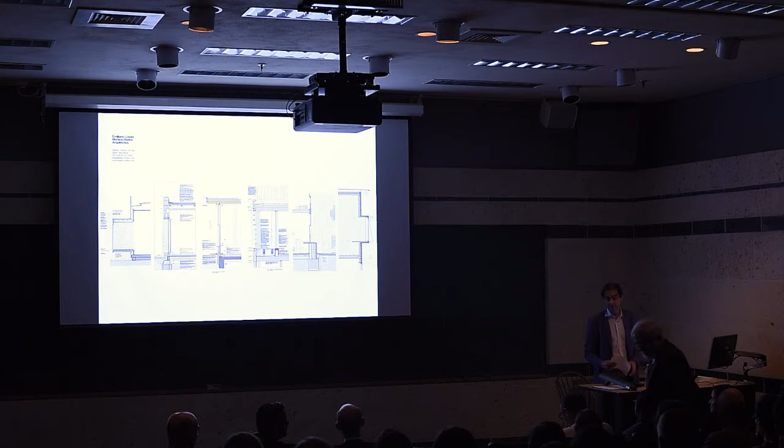Architecture awards, including some very prestigious ones. I'm going to go over some of them. The Young Architecture Award of the 10th Spanish Biennial of Architecture and Urbanism. The first place also in the 7th Ibero-American Biennial of Architecture and Urbanism. The first prize, the Architectural Review Emerging Architecture Award from London, a very prestigious international award, and the design distinction from the ID Magazine Annual Design Review. Also Spanish awards from the FAD Architecture Award and a nomination, a very important European award, for the 2009 Mies van der Rohe European Award.

The projects have been published in national and international publications such as Croquis, Domus, ID, Interior Design, and the Architectural Review in London. The work also has been exhibited in many different venues, including in Paris and in the Venice Biennale. All the work has been recently published in a monograph. That is a fantastic book. I really recommend looking at it. I have it in my office. Have access to your office? Yes, my office is always open and it's on the table, so you can go there and look at it.

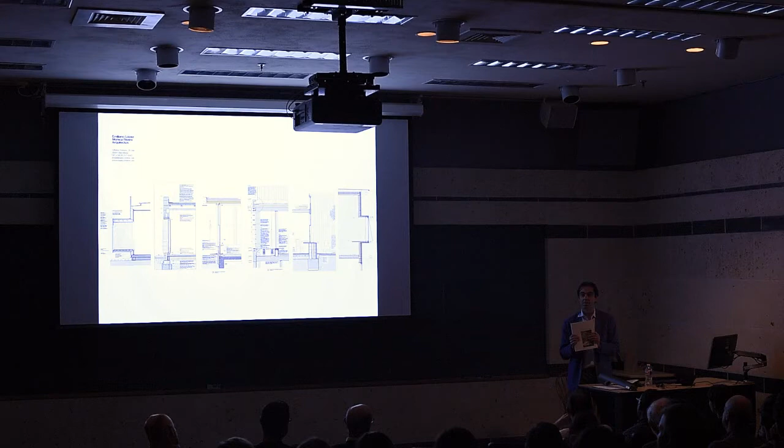What I like about the book, and I discussed it with Monica, producing a book like this really feels like another building, another project. You can see almost the exact same sensibility of the work in the book itself, in terms of the care, the attention, the detail, and the design sensibility, and it's a huge effort to put these books together. I think it's a fantastic representation of the work that we're going to see today in the lecture. So please join me in welcoming Mónica Rivera today to the school.

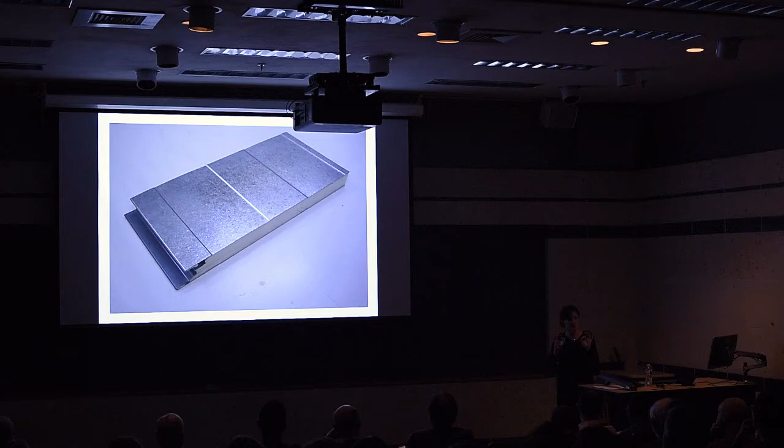So, well, we said we'll think about it, and he also asked for certain trades that he had very good ones. He said if we could use those trades, that'd be great. So finally, we had to build here in this hostile place a 4-star hotel with a contractor with no experience, and the clients didn't have any hospitality experience either. We didn't either. So it was really a challenge, and we decided that what we had to design was not so much a building, but a strategy to make this happen.

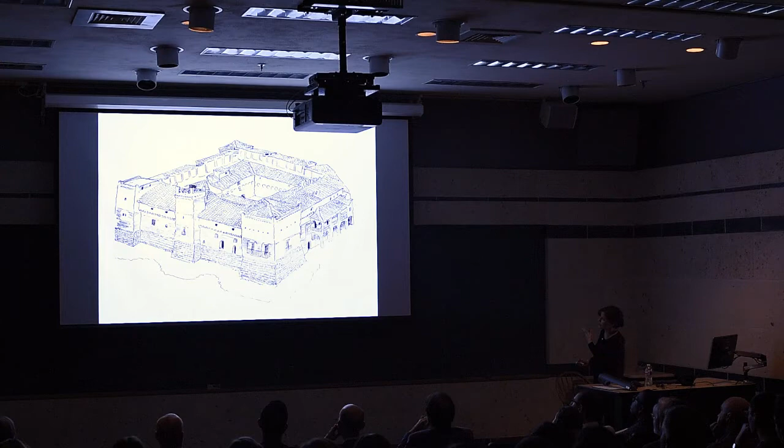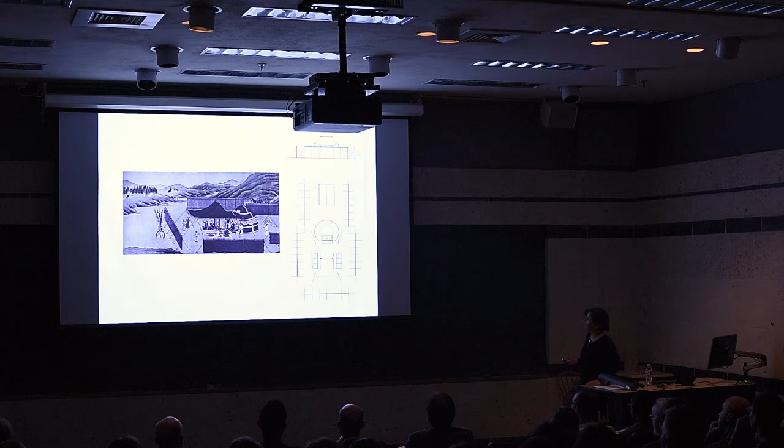So thinking of this extreme weather, we looked at buildings in the surrounding area, constructions protecting from the elements. In this place you want to be protected and feel protected and look out to the landscape, but heavy construction did not seem appropriate for such an open land. So we were also interested in the opposite, which is a very light construction, almost slightly touching the ground, for these sporadic, how do you say, stayovers in this place.

So we began to think about how the windows and all the openings could protrude out to create a false perception of depth. We began thinking of that sandwich panel as a real possibility of making a very thin enclosure, as if the facade is almost the lining of the construction, as if the masonry might be missing from the sides. So we began studying different ways that could be done, but finally we settled for the simple, very economical solution of the square projecting window, sometimes with a bench, sometimes with a bed. And we established this relationship very early on between the bed, the window, and the tree or the landscape.

This was an early image of the project. We kept it all in one story to make it simpler to construct. And for the massing, a reference was Donald Judd's concrete boxes in Marfa, as a way of working with a very orthogonal and simple structure by turning it, creating a play of light and shadow, and minimizing the massiveness of the building. Early models of the place, essentially with a series of patios in the center protected from the wind, other patios protected with some other light element that we didn't know then, and some of the rooms with outdoor access.

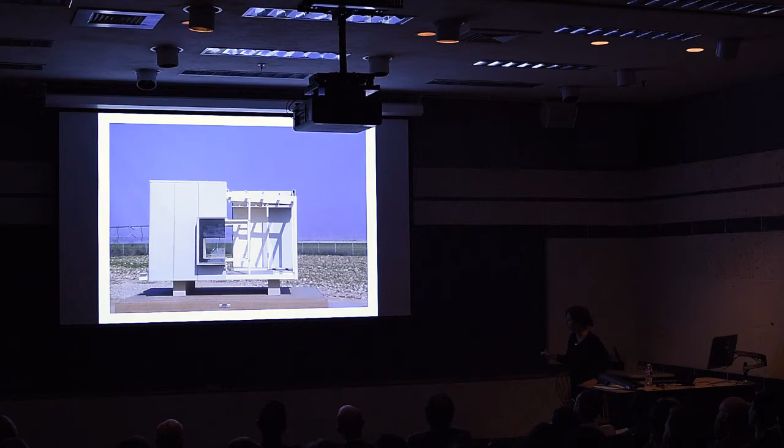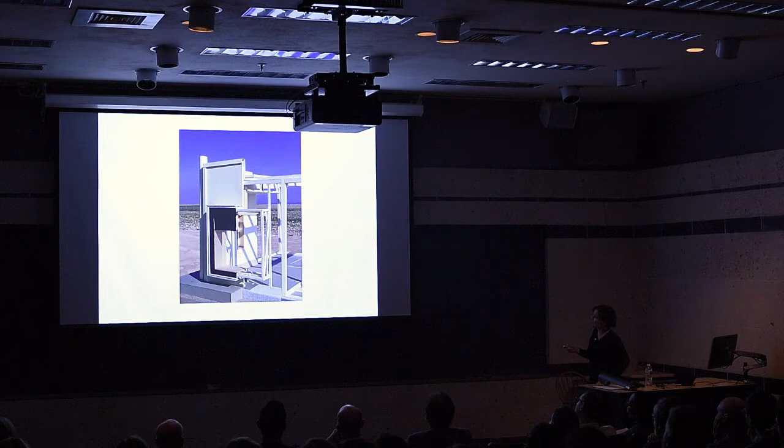These are study models of the interior, because we were also working with interior design, and we began making these very large models. I don't know the scale, 1 to 10, I don't know what that is. To study the facade, the detailing. This was also a way of showing the constructor and the metal worker the intention. So we were working simultaneously with the structure and the shading and the inner linings and baseboards and so on.

And early detailings of the window, and finally this final. So it's a very simple light construction. It's almost a shed construction with an inner lining of gypsum board and plywood, with the window placed so that you cannot see the frame from the inside, and with the shading devices here.

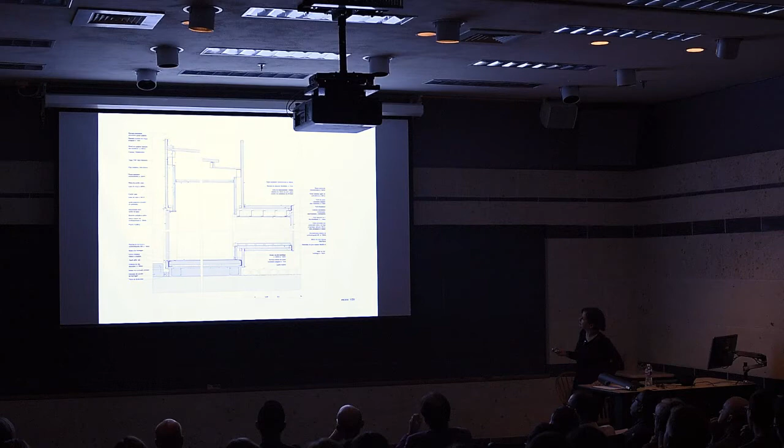As you can see, the palette of materials is very raw and simple, keeping the shower here with a bench that we also designed, and these are the windows, this mid-space. It was important that these rooms would be very enclosed to avoid having all the dust coming into the room, etc.

All the structure was prefabricated and stored and brought into site when permits were given. And this is a little bit the construction, with the glass placed in first and then the skin. And this is a plan of a typical room. Some of the rooms have an enclosed patio with a fruit tree and an outdoor tub.

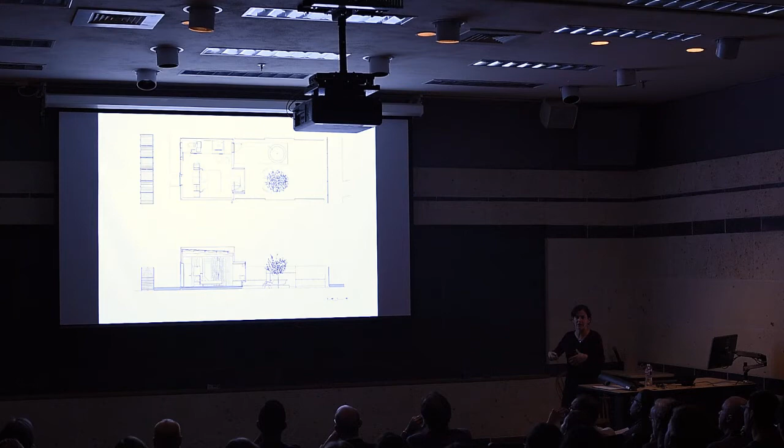But they all have this very first entry space where you can just leave your belongings open so that their presence is not in the sleeping area. That's the shower that you saw before. And this window has some exceptions, some are U-shaped, some are benches, etc. And this is the place where you come in and you just leave all your things and you see through, but then you come into the space and there's no objects, but you can reach them from the bed.

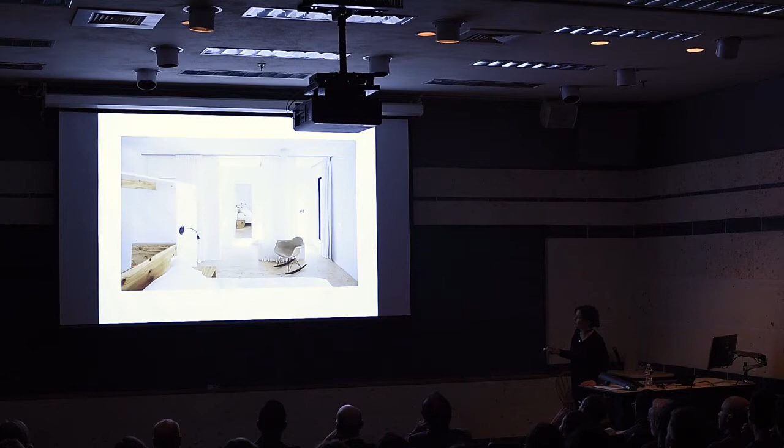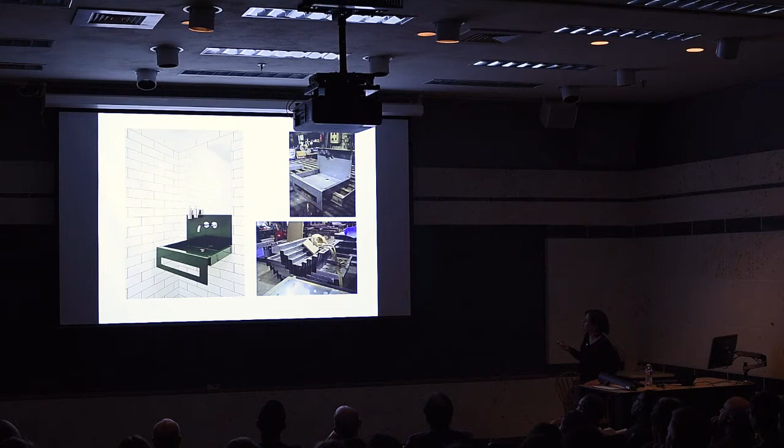In the end, all the windows are variations on the same theme, same window but different outlooks or different patios or different materials. And these outdoor bathtubs we also developed with the metal worker who was doing large-scale piping, and he had these wonderful catalogs of metal pieces that we put together. Oh, here he is, testing. And also some of the sinks. So since we had very direct contact with the metal worker, we could be very fast at doing prototypes.

This is again variations. These are the suites. This is another type of suite which is looking out into the field. This is the same one, at night. And then the same detail was also used in the dining room in the restaurant. The floors remind of the grounds of the natural park. And these are some photos of the inside, the lobby and the bar. Again, the lobby area. We also worked on these chairs.

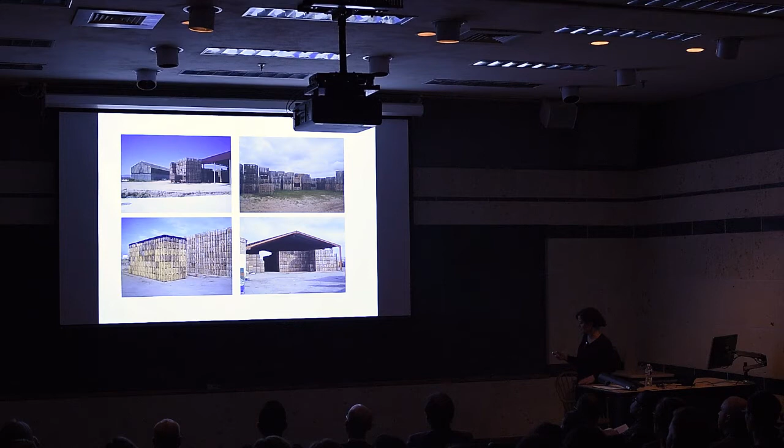And the facade of the building, since we were working with this very simple material, really is conformed by these wooden boxes that are used to collect the fruit and the vegetables. This is an area, a big producer of the best vegetables in Spain, I would say. And these were used as windbreakers for the space. These are typically used around the site, and when they lose stability, you can purchase a big lot and recycle them.

And they were used to enclose some of the outdoors, the parking area, the sequence of different patios. That's the main entry here with the cherry trees. And also enclosing the pool area. And this is the industrial character that it has.

And these boulders were found by the client on a nearby site of a road. So he said, I have all these boulders, they're almost free, what can we do with them? So we thought, maybe if we put them around here, it becomes a horizontal fence almost, because it's very difficult to walk fast, so it will delay the approach to the rooms and also keep the sheep out. So we placed that surrounding and also dividing their plot from the wheat field.

And that's the first project. And the second project is very different. As you can see, it's a very thick construction. It is in the north, on the coast of Spain. This is El Port de la Selva, a coastal town. The house is located up here. It's on the top of this hill.

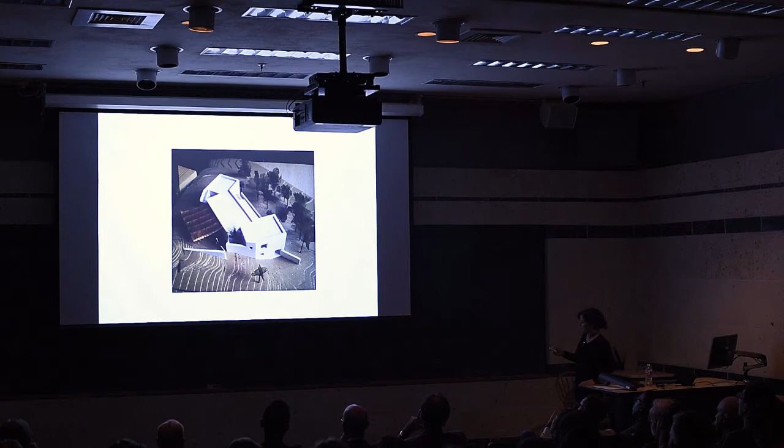So that's the existing road. Here you would leave a car, and there's a room down here. You would go up, and the entry would be made through this patio. That's a plan. So here you see the living spaces in this simple volume with a kitchen connecting both spaces. On either end, there are the bedrooms.

They are rotated to adapt to the terrain, to keep it perpendicular, but also this space in between, we used it to create very small patios so that when you come from the beach, you would go in there, have an outdoor shower, take your bathing suit off, towels and everything, placing it there. Then you would come to the bathroom, and then finally out to the room. The same with the parents' room. You would come into the bathroom and then out to the room. They all have also a tree. And these are views of the house.

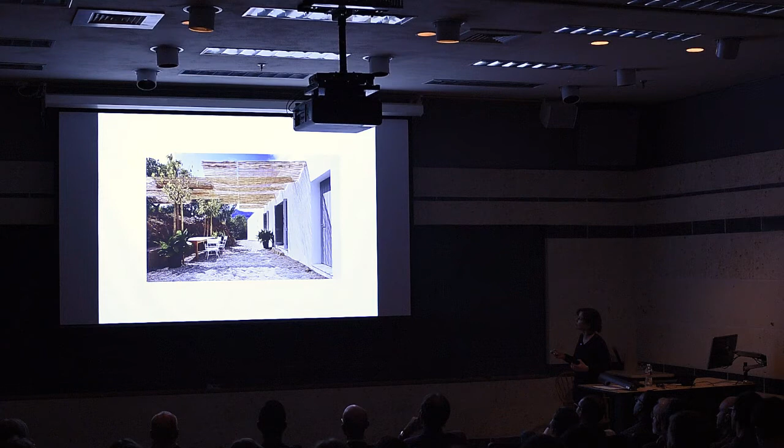So the construction is double masonry wall, very thick, 36 centimeters. It makes a very fresh environment inside, very cool. And using traditional louvers lifted up from the ground and having these views through from patio to terrace. And also using traditional vaults. These we also did because they wanted to use a contractor from the town, which was very good at building traditional construction, so we also adapted to that circumstance.

And we used just the traditional concrete vaults and beams with a ventilated roof. These are views through. That's the kitchen connecting through. And this is the entry patio and through this volume. And this shading, there are some tensed cables that are used to put different cane for shade. That's changed seasonally until the trees grow enough. So these are the cables.

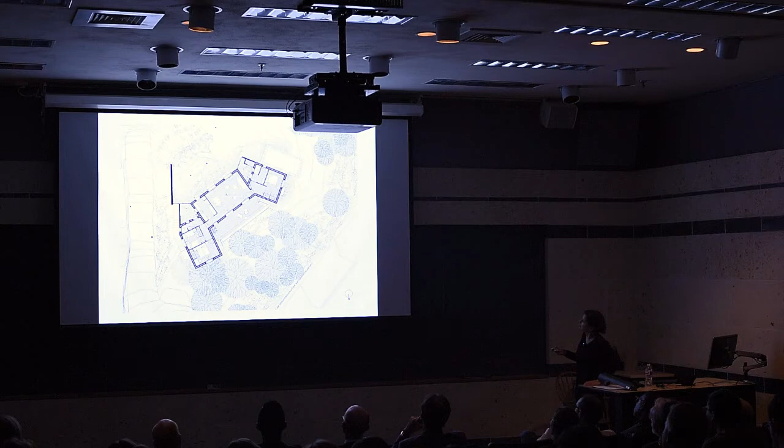And this is another denser shade, and the trees have grown a little bit. That's the entry. And these are the little patios in between the rotated volumes. It's the entry door, and this is the parents' patio and a way out to the pool. And they have a stair going up to the solarium, which has fantastic views at the top.

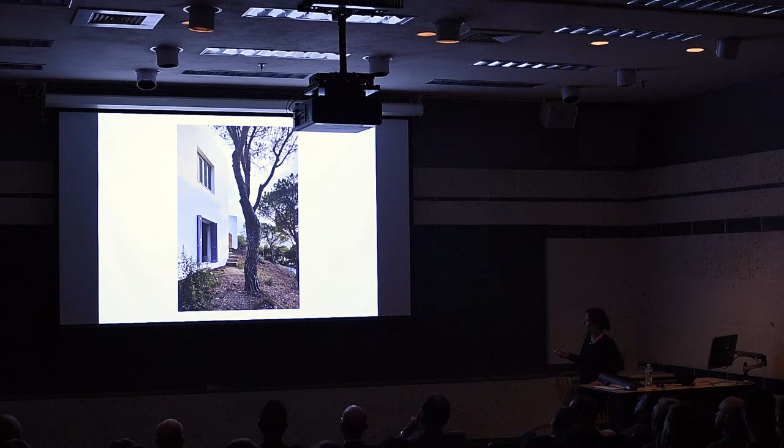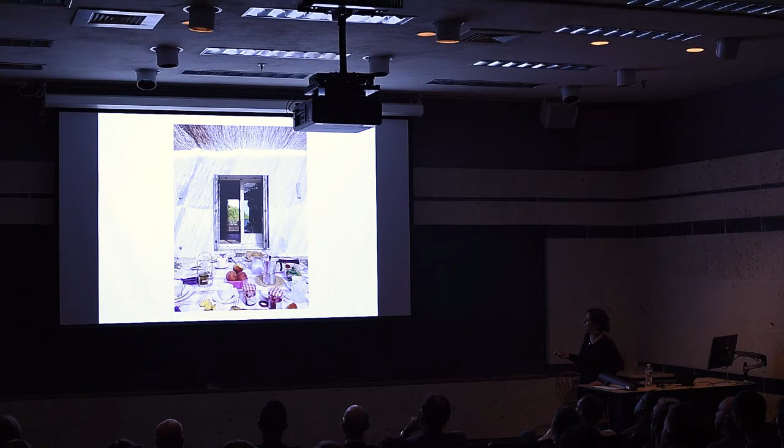And the pool is placed on this side to be protected from the Tramuntana at all times, except that it comes out a little bit so you get a view of the whole bay. On the lower level, there are 2 rooms that are accessed from the outside, also to save on space and square footage. And 2 stairs connect these rooms to the terrace above. So these are just different views looking from either side, and this is where they have their breakfast normally.

So this is a young couple. She's a yoga professor. So we began working again with the idea of a patio and a house that can look onto itself. And the clients, since we didn't have a really clear reference for the material, they wanted something with dark colors, with wood, something very light.

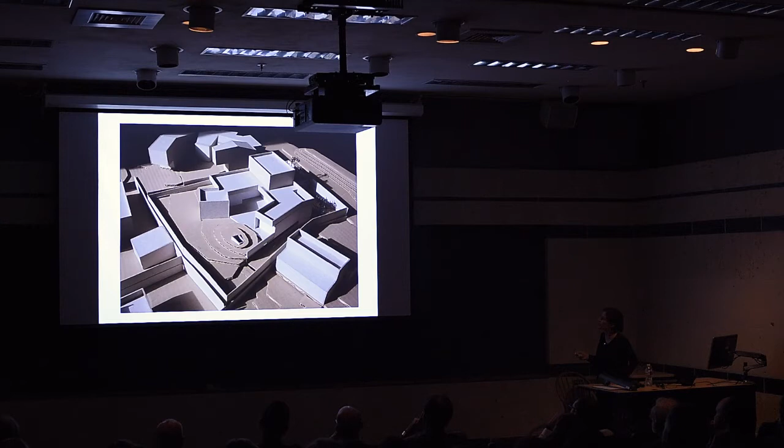They wanted something sustainable, so geothermal energy and so on. So we then researched the cross-laminated. We had an experience with glue laminated slabs many years before, so now we wanted to experiment with the cross-laminated systems. And this is an early sketch thinking about that central patio and how the house might look onto itself.

From this pavilion at the end of the sequence, which is a place to... He's in the advertising business, so he wanted a place to project movies and listen to music. Initially, they wanted that in the basement, but we said, with the garden, why don't you make it happen surrounded by the garden? Also, the geometry of this house and the plan was really guided by these two spots.

They were made in such a way, and these trees were placed in such a way that in the summer, this is completely shaded at the time of lunch hour during 4 hours. Spanish lunches are very long. And same here, this has direct sun for the spring and autumn during the lunch hours from the beginning to the end. So the placement of this, the geometry is responding to some of these things.

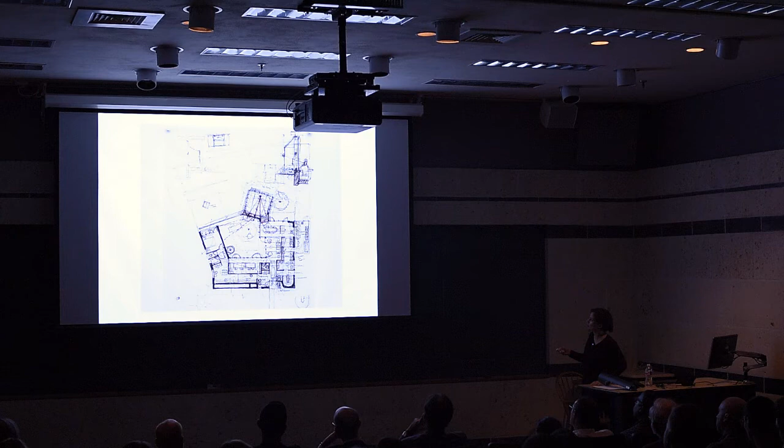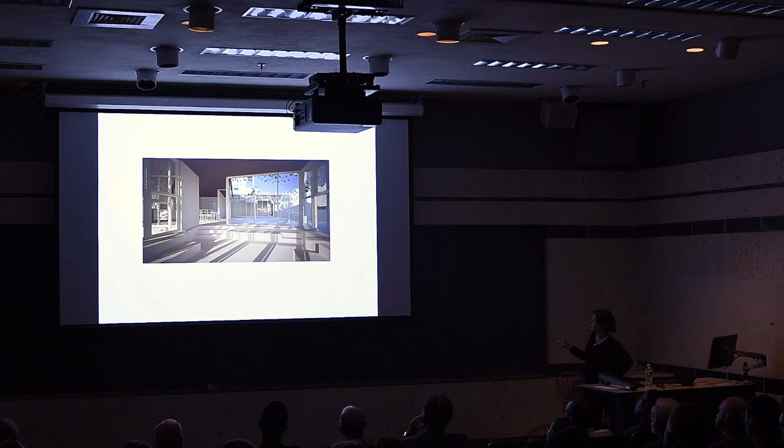Also, the west wall is completely blank. It's also used to project movies or project the leaves of the trees. And this is a model, and this is a rendering studying the projection and the placement of the trees. And these are early sketches.

We paid a lot of attention to the circuits of moving, how to move through, essentially creating a back circuit. We wanted to avoid having hallways as much as possible, so all the rooms are pass-through rooms, except for the pavilion, which is the only dead end. That's a final configuration with an entry leading you to 4 different options: this to drop off all your things, the helmets from the motorcycle and keys and all that, the big closet and the stairs and the mudroom, pantry, kitchen, or you could go in through this compressed space into the dining, living.

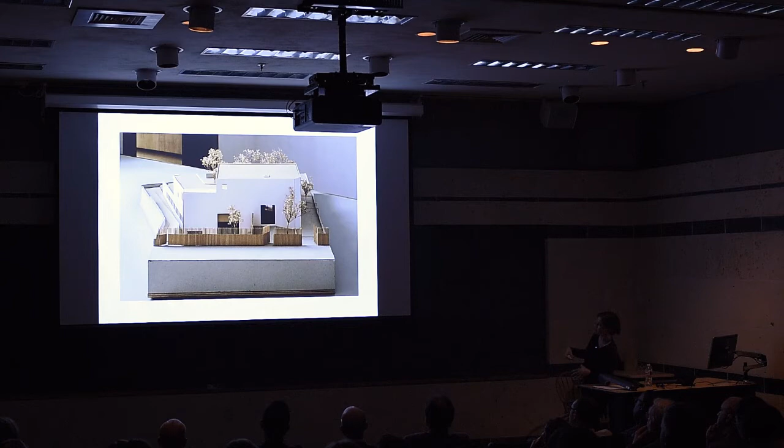Oh, that's maybe better. Yeah, so all the, let's say, good rooms are surrounding the patio, this outdoor room, except for the bedroom. So in a way, you can always choose how to move through with these 2 layers, or maybe 3 layers. The yoga studio is below here in these sunken patios. The access is from down below, from here. So these are sunken plazas that are more open to the neighborhood, while this is very private.

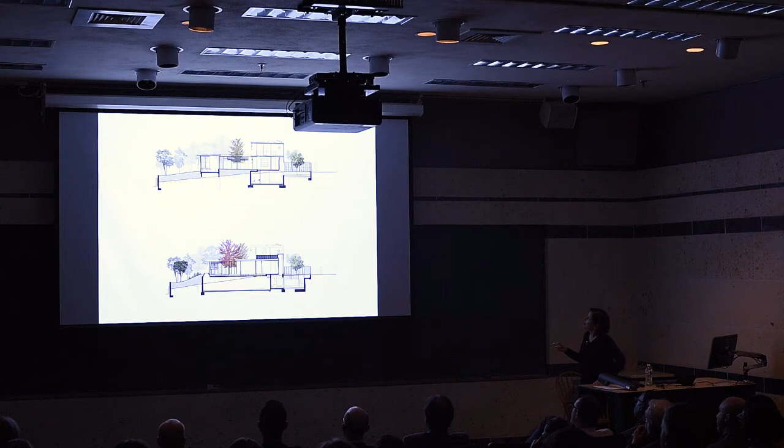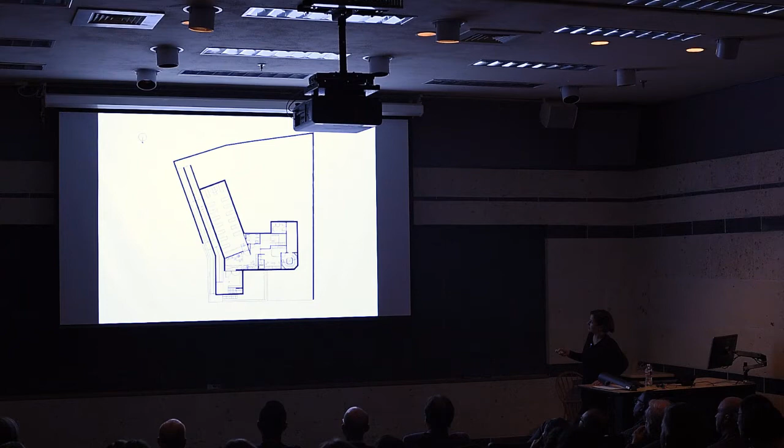And here's that sunken plaza with a skylight and natural ventilation from the south, and another one from the north, yoga room. And above, always taking care of having cross ventilation constantly. That's a yoga house, her yoga studio. And she also has a secret access through the ladies' changing room up to the stairs connecting the room. And upstairs there are 2 elongated bedrooms for the kids and a small terrace.

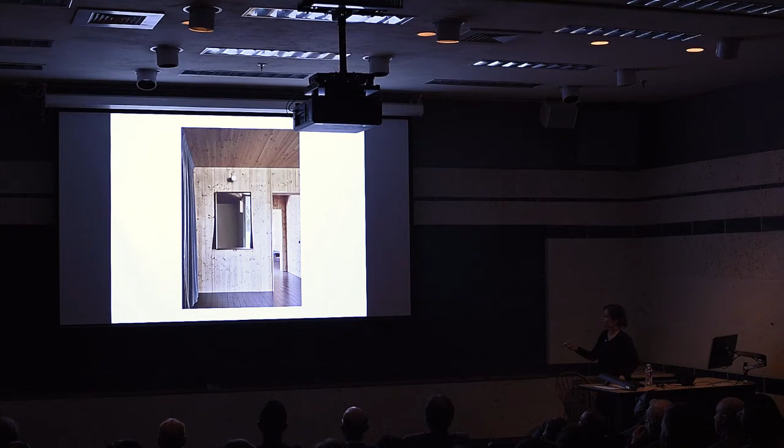And the house, the more private entry to the house. It's very closed off to the north and to the street, very private. With the entry, a little window to keep the air going through here. And this is that hallway that gives you all the options for moving through from here. And a curtain takes you to the dressing area and closet.

A place to charge your phone, so you don't have to go around to pick it up when you forget that it's on the other side. So you just drop it here. But these are also ventilation vents going through where you stand and passing through that section, through this patio. And you actually feel the speed of the breeze here.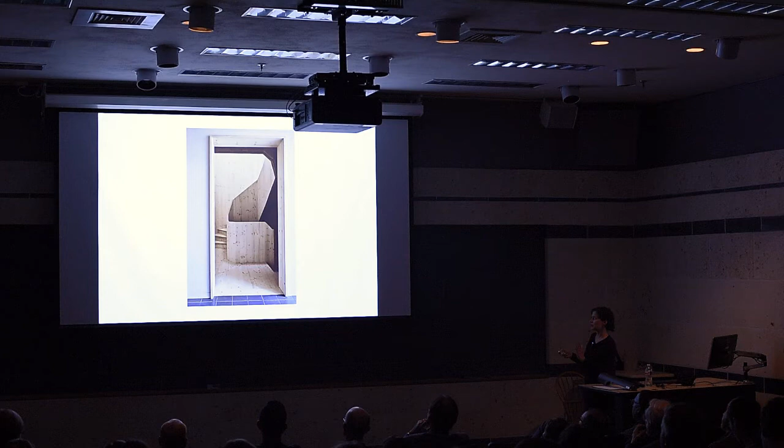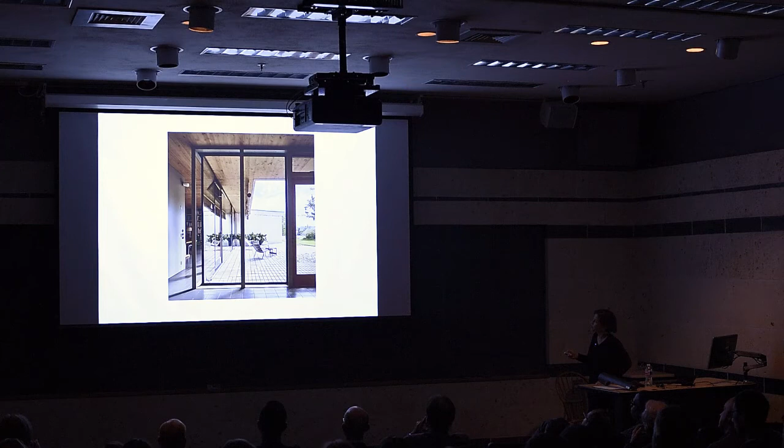Then the other route is through this stair, which goes all the way up, all the levels of the house, and then through this compressed entry to the living spaces. The kitchen, we also took care of placing it so it would receive sunlight in the winter at breakfast time. And some images. It's a very light steel construction combined with wood walls and wood slabs and ceilings. So all the overhangs are calculated to keep the sun out and reduce glare.

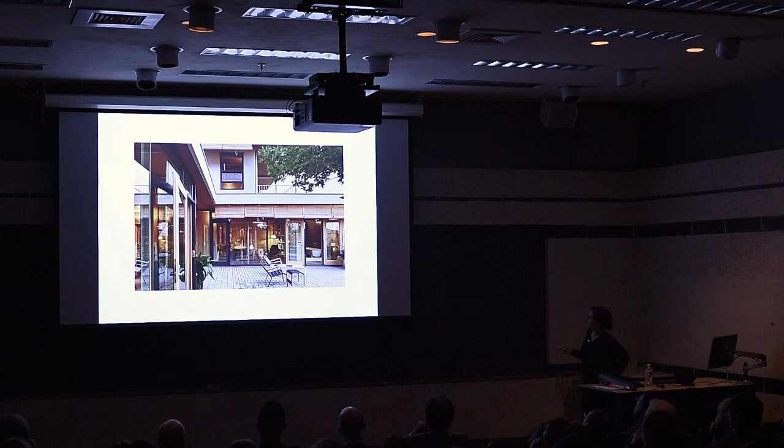This is the study. These are these little vents here and also here, and some special doors. And that's keeping that ventilation through the house constantly. And through the stair, the night cooling is happening through the shaft of the stair above. That's the patio, and this area here is the shower and tub, which is this room that finally we placed, just taking advantage of the patio and the garden next to the study.

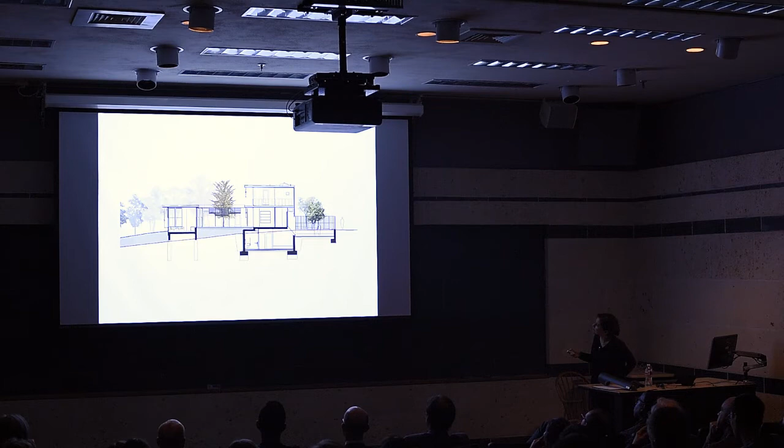And it's a place that the kids like. The client sends us these snapshots every now and then. I don't know what that is. And that's the pavilion where we use this shading; it's a very traditional shading used in Barcelona.

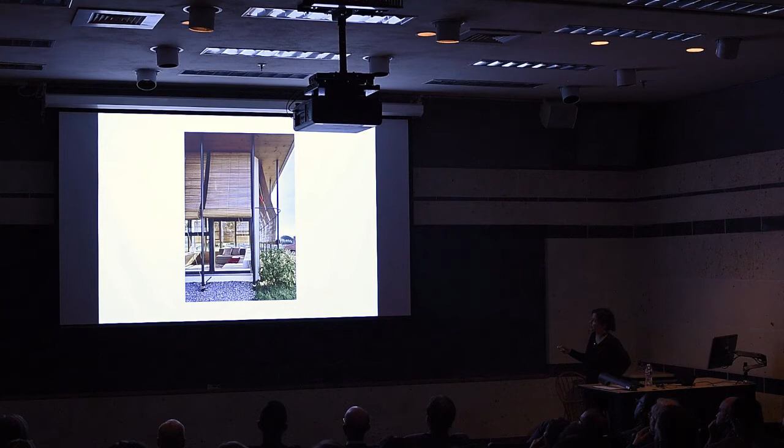So we just detailed these uprights, not touching the ground, and then these are manually put up and down. Oops, sorry. And we also did these modules, so they have been also very successful with the kids.

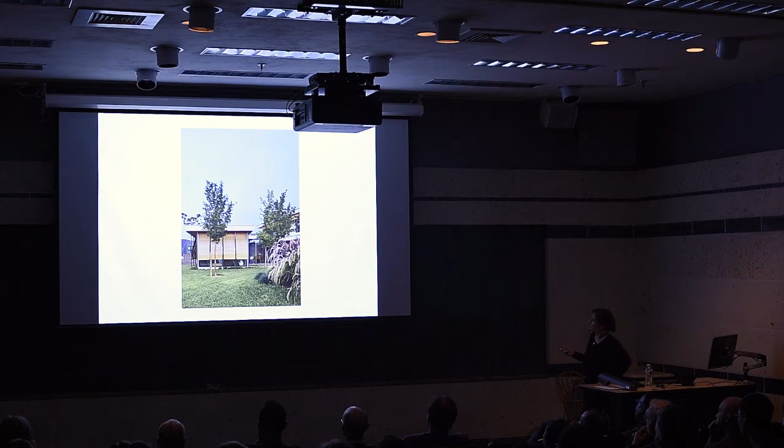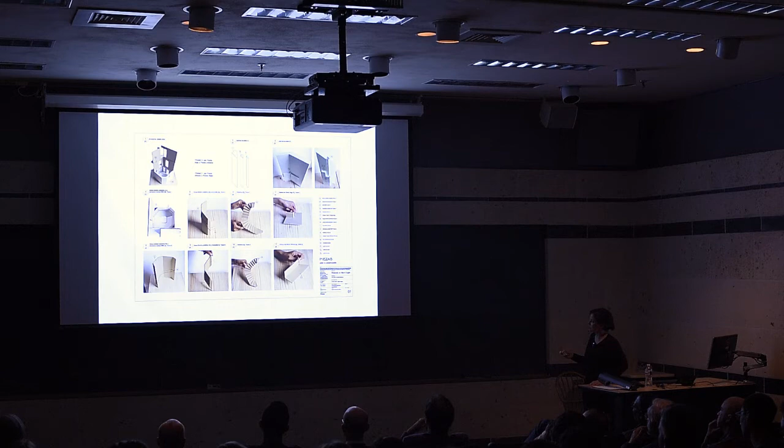Just very quickly, the construction, the very thin metal structure with the CLT panels being placed, plans of that, and the detailing of maintaining their small reveal, so the wood panels are sort of floating above the structure, and a little bit the stair, which is like a room in itself, the plans for its construction, and the inner spiral is the structure of the stair.

Very fast. Some of the construction, and yes, that's a structural element. Looking back at the entry.

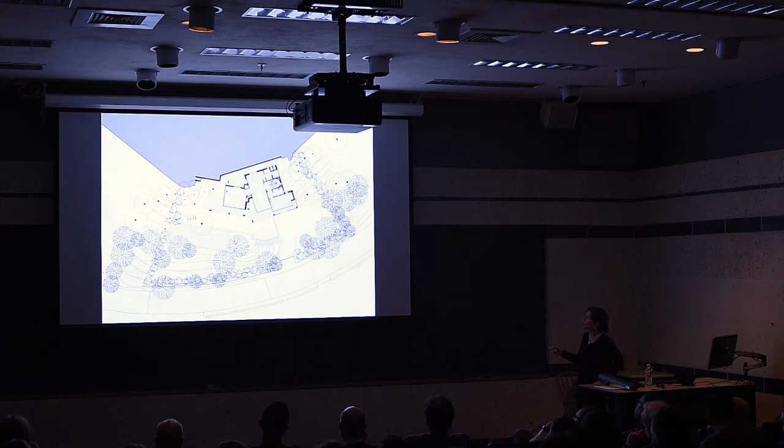Okay, here, sorry. Two volumes that are connecting through the back. This is the upper floor, and we made this intermediate space with ceramic louver, designed and built in to keep all the rooms looking at the views, but being protected from the sun. So these all glass enclosures. This is the ground level, keeping the rooms away with overhangs and porches to protect it from the sun as well, and to maximize the flat area, which is not very much.

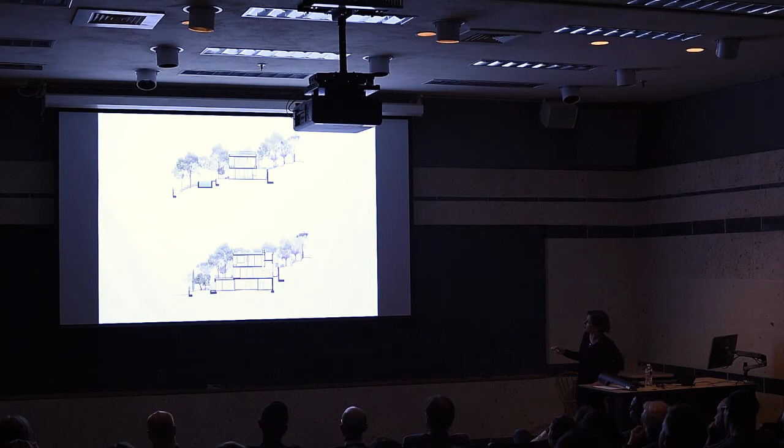As you can see, the site has two streets connecting on either end, but the entry is from below. So it's this space here. These are early studies of the patterns of the tile. Also studies of the tile in the summer and winter. And this is the final tile. These volumes.

These were custom made by a ceramic manufacturer, third generation, Toni Cumella. We worked with him. He said, "Oh, I can do anything." He's done very complex ceramic, amazing things. And we just said, "What is your basic piece?" And this is just the basic extrusion that he makes. So we decided to work with that, and they come like this. They're two together, and they're broken and separated. So we worked on the enamel.

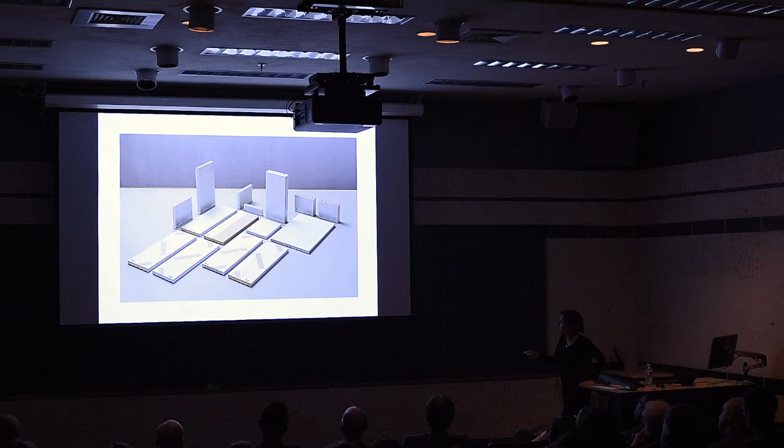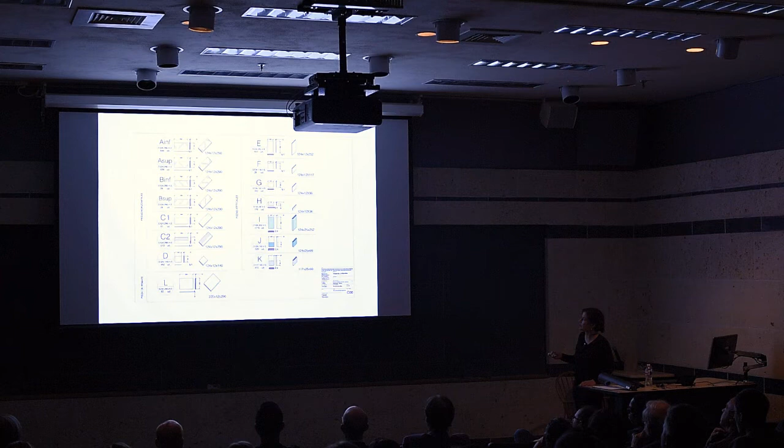So it's a glossy enamel, and we worked with some, how do you call those, stencil? I don't know if that's the right word. We were keeping some areas with the texture for grip. So this is the glazing and the final pieces, and this is sort of the inventory of the pieces that we needed to make the lattice, the plans, and the reinforcement, etc.

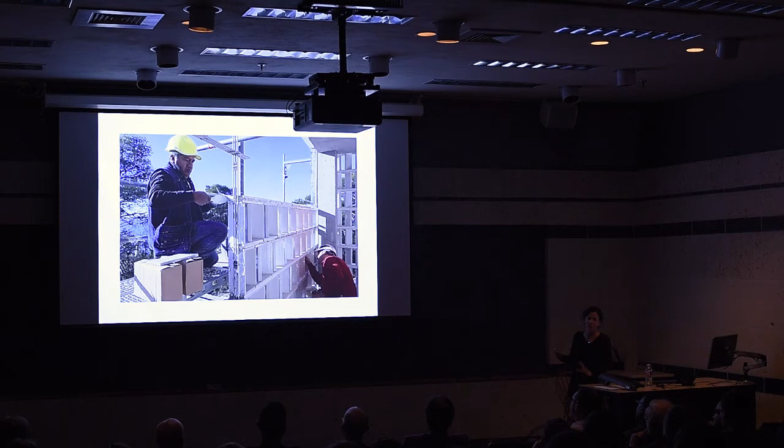That's some fixtures of the construction, the reinforcement bars. Manuel had actually done the floor of the previous house, and before going into this, we asked him, "Do you dare doing this?" And he made a mock-up, and he says, "Yes, I can do it." So then we decided to do that for this house. Otherwise, it would have been tricky. So he played an important role in the decision of this detailing.

This lattice rests on these prefabricated concrete beams that rest on an in situ sandblasted structure. These are the prefab beams, and this is the space in between. These are the prefab cast, and they are in fact concealing security gates that are here in this raised platform in the bedroom.

They slide like that when the clients are away, and also these gates that are enclosing the openings, they slide and they sort of match the pattern of the screen. Lattice, thank you. And here you see the gate. So, well, the living room opens up completely, and these are some of the spaces as they are now.

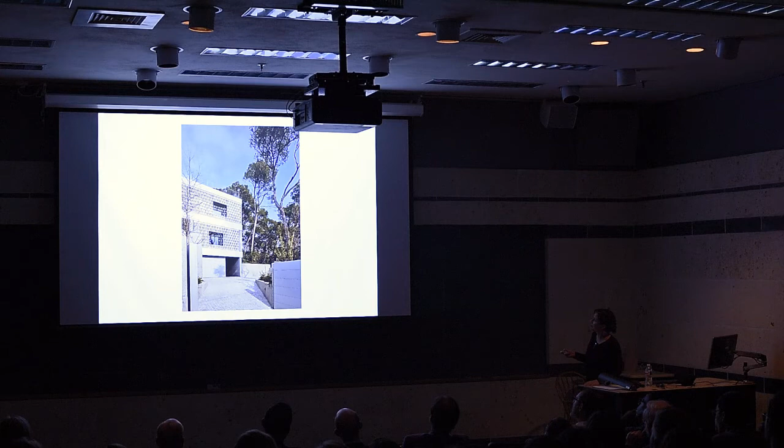There is a lower level with a garage and a turning plaza. The gardens, and these are great windows. I'm not sure what that is, but the upper level. We see the bedrooms, shower enclosure and the tub. And these are different views of this space from different heights according to the use. And some photos of the in-between space. These also open up completely.

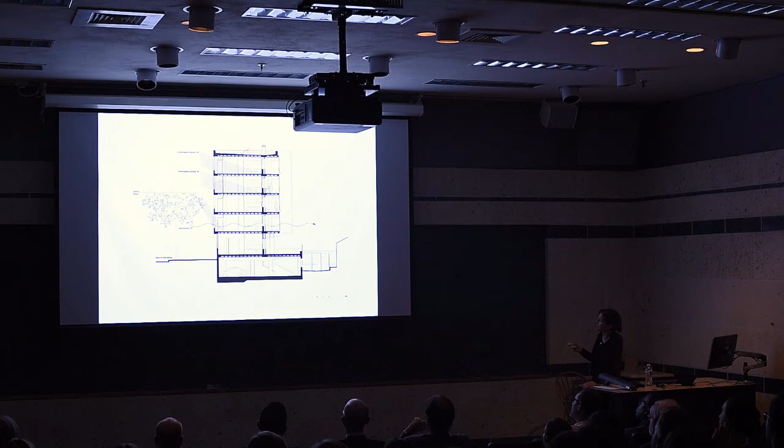So the light changes all the time, and this is with a full moon. This is sort of a fancy version of another galleria that we made for a social housing project in Barcelona, where we were working with this traditional galleria space and this open access to the flats, where it's sort of a social space. These are the little sunrooms in the units and the open walkway with these setbacks.

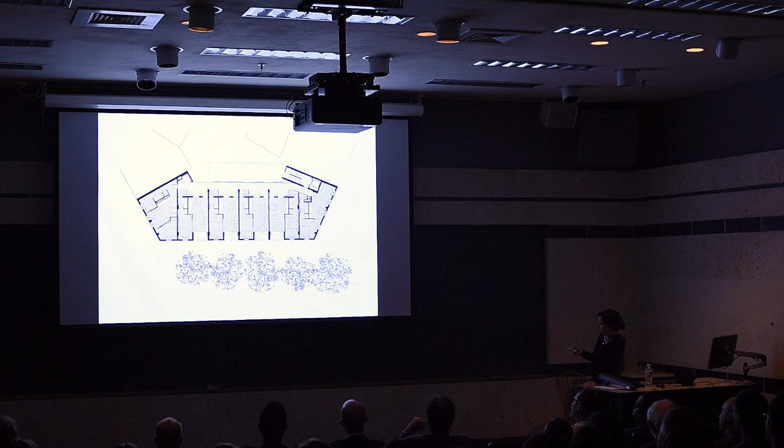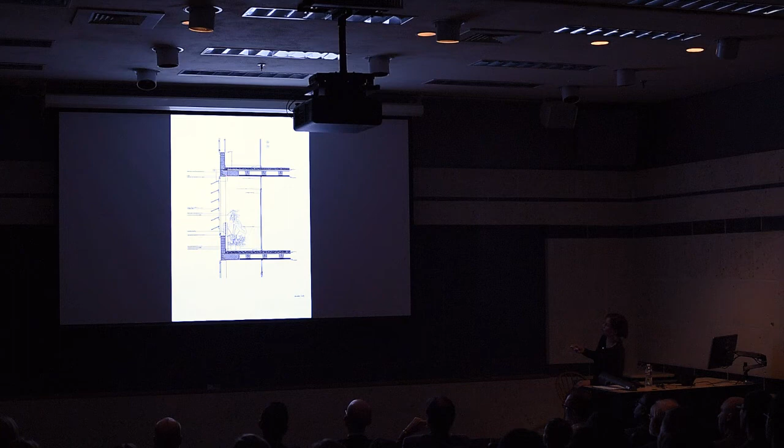These two filters in the front and in the back. This is the final plan. And this is this space in between where we use these louvers essentially so they could be maintained and cleaned by the tenants. These are typically used in the back, in the kitchens, and so on. We decided to put them in the front as the main facade and have that little space.

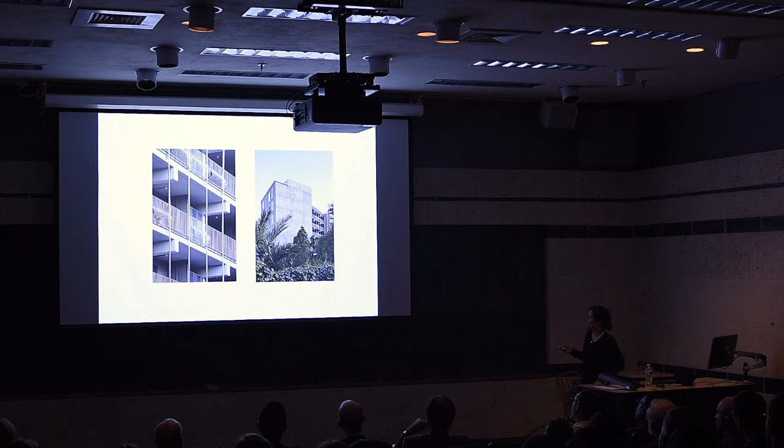And in the back, the walkways. It's a space for appropriation, and you can see through inside. That's a very deep window also to pass things from the kitchen out. These are photos of the residents now.

This project is a renovation. It's completely different. It's a renovation of an old building, completely different context. It's this little building here. This is in Santiago de Compostela, in the main plaza, where the city hall and the cathedral are. This is a place of pilgrimage in Spain, very important. And it's this house over here.

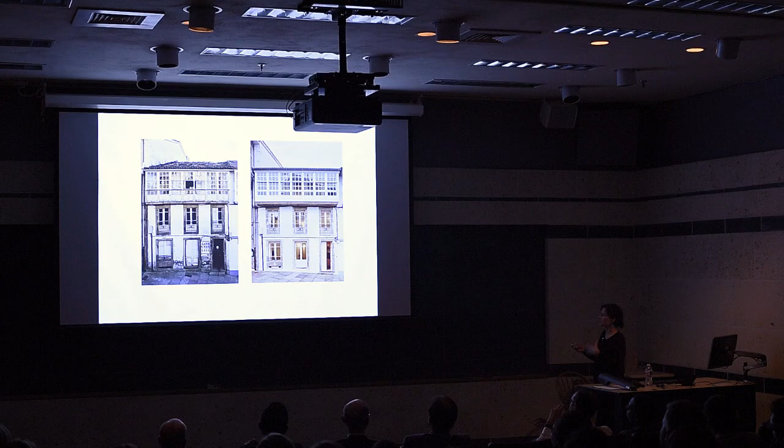It was in total state of decay with structural problems because of this 70s addition. We basically renovated the whole building, recuperating the windows as they were and fixing the facade. This is how it was. It was in total ruin. Santiago has these wonderful typical gallerias outside of the main granite facade. And the back one was completely rotten. But luckily we had these two very big camellia trees, which are quite wonderful.

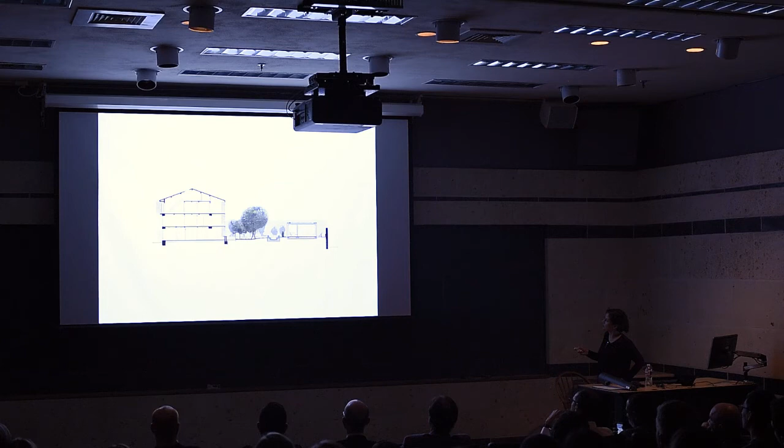So the house became, this is a hotel apartment, forgot to say. So in the old house there are 5 apartments with little kitchen and living area. And on the ground floor there is a sort of a common area with a bar. And in the garden there is a newly built pavilion also of cross-laminated timber and a stone fountain pool that the pilgrims, after walking many days or weeks, can use to sit down and rest their feet. And also trying to make these small patios with the existing stone walls.

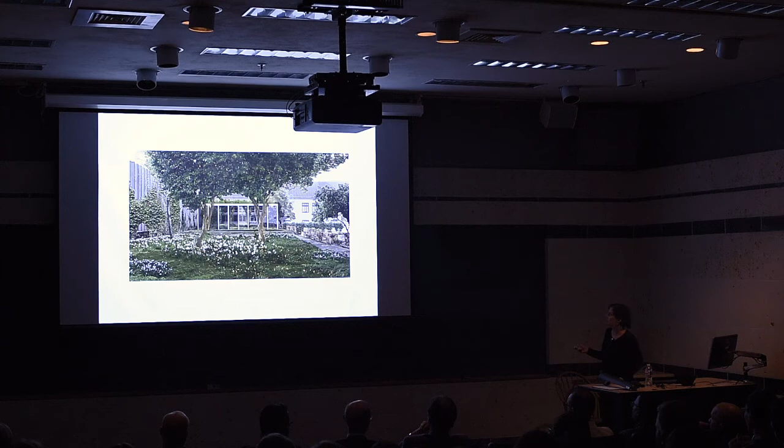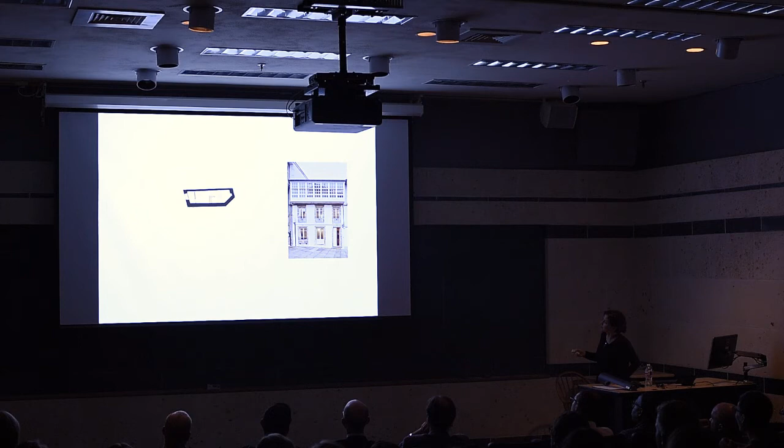The basement level is heated with biomass, and this is the silo for the pellets, and they're fed through these openings in the front. And these are the upper levels with the rooms. Towards the street, little kitchenette, and in the back, living space, bedroom, and bathroom. And on the upper level, that room has the thin galleria towards the plaza and a mezzanine level.

I won't go into this, but the renovation. We maintained the floors and patched the parts that were not good, and did all the fireproofing and soundproofing from below, and added some structure to the beams, which made these spaces separating. The stair was also cataloged, so we fixed it up and painted it, and these are views of the gallery. And this is a really nice, very narrow, very wonderful space, looking at the cathedral.

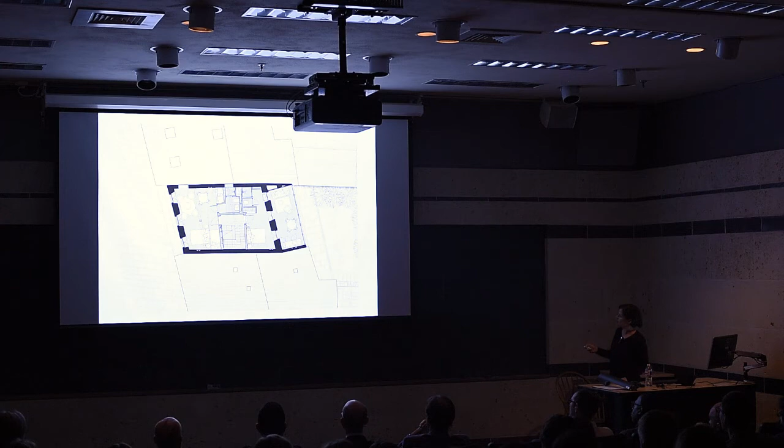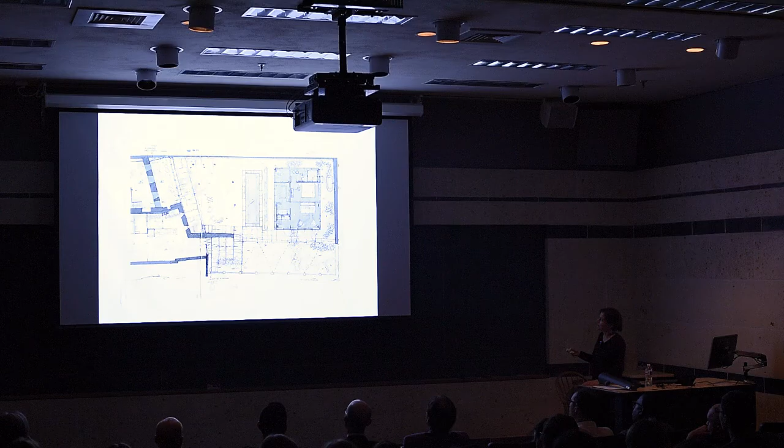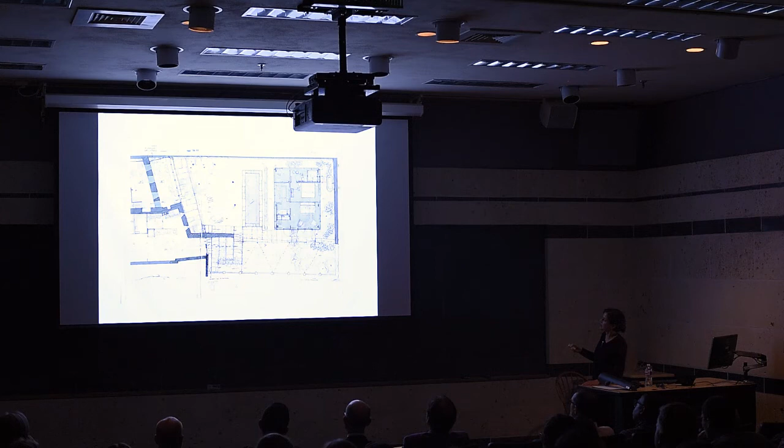This is the back galleria, which was torn down and rebuilt. And this is how it is now. Views through the shower out. And this is a sort of a plan of the outdoor spaces. This back room, we paved it with the same granite as outside. So from here, the guest of that room would come out from this ramp and enter through the side to a main space, that dining area, and the bathroom, which makes use of this patio, and also has this back patio for private use.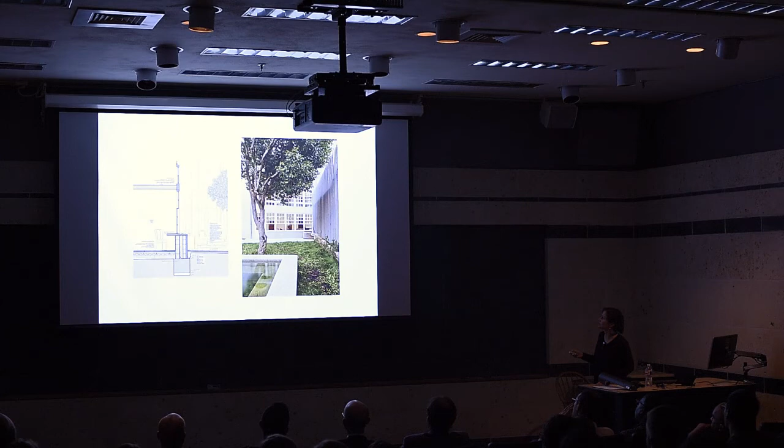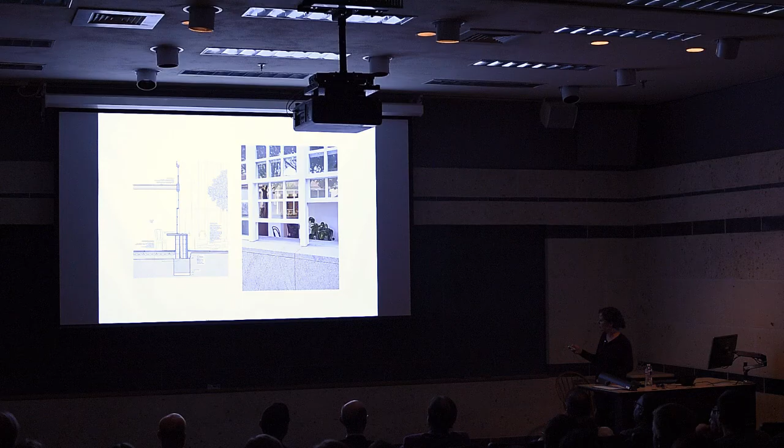The detail of the sill at the bar is we used one piece to have a continuous sort of surface with a slight step for water and a slope, and the wood never touches the stone. It's lifted to allow ventilation. So it's the traditional one but with a little tweak in the detailing here. That's that. And that's a view from the entry all the way to that room.

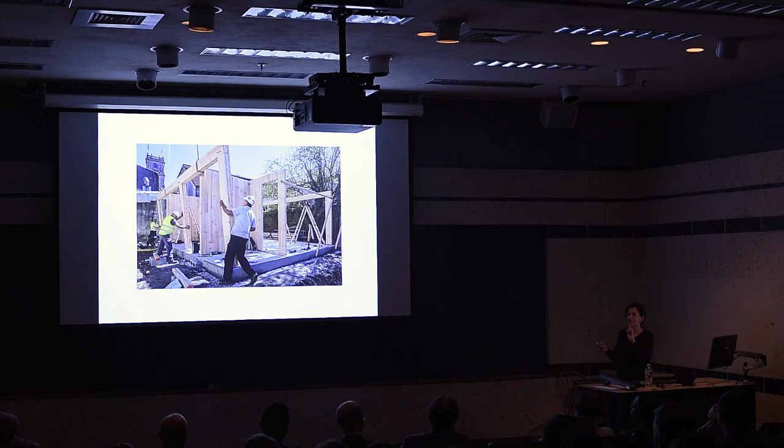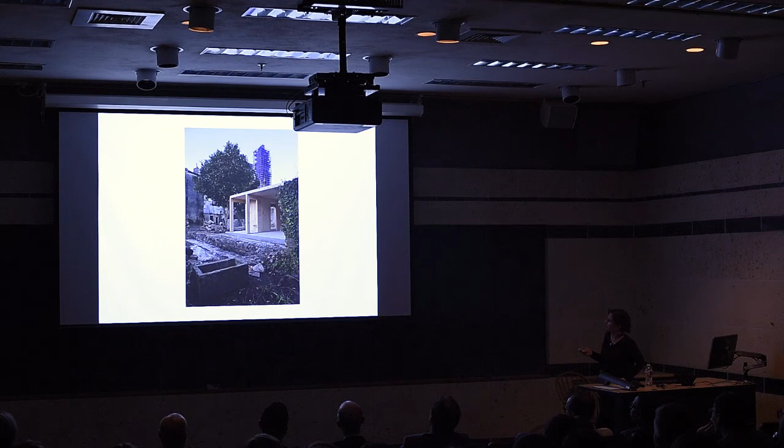A little bit of the construction, the panels going on site, and the contractor also made the panels. These are made by a Basque company, but he sent them Galician wood. So this is the first Galician CLT. So he was very proud of this. I don't know, it's just an anecdote, but he was very, very proud. Construction. And the final.

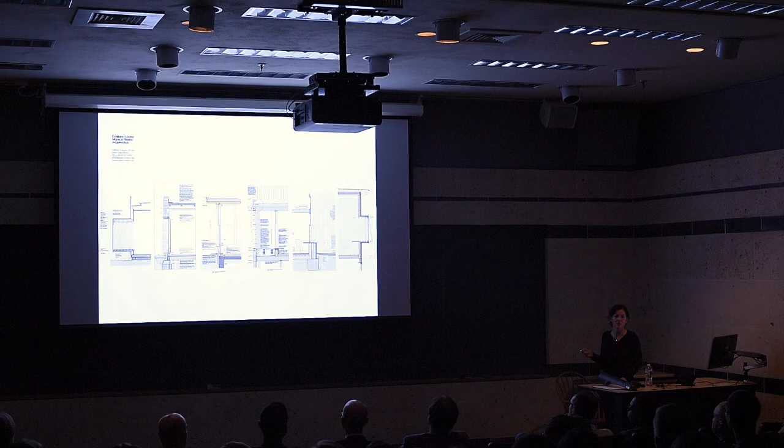And finally, this house is also in the coast. Another slope side. This was the most difficult one because it doesn't have views. The orientation is not the best. It's not a very good site. And these are two homes, two holiday homes for a family. And the views, in fact, the good views to the sea are sideways.

This is in a town that was an old, here you see a cork tree. This was an old cork producing region. And, oops, that hand, I'll keep up. And since we had these experiences with the CLT and this Basque company, we decided to work also with CLT and make a very compact house and insulated with these cork panels that are produced in Portugal. Very good insulation also for fire.

And we decided to try to maintain as many trees as possible to maintain the character of the place and made this concrete structure completely detached from the cork. That is the only place in the house where you get the views to the sea. Well, also these rooms, right? But it's the only, so it's like a dining room. This is the space. The space in between the houses is the access, and also goes all the way up to a pool at the very top of the site.

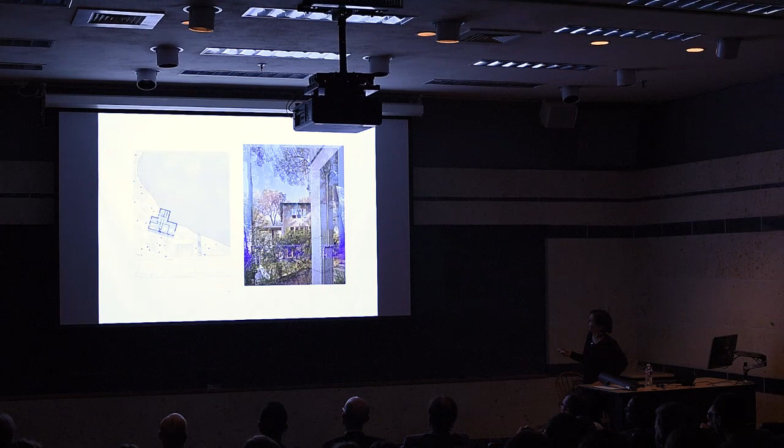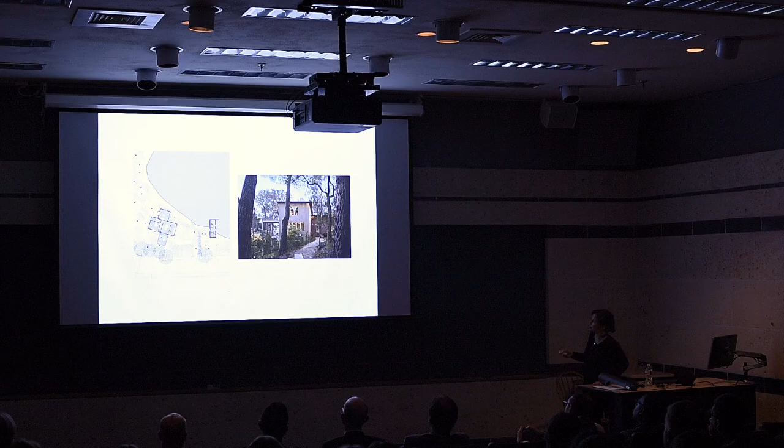The bottom floor here with 3 bedrooms, guest bedrooms here, and this level is the one that's connecting the 2 houses, with a living room with a little more height than the rest of the rooms, kitchen, dining and room. And that's the living room height. It's this here, so you could look diagonally up and looking back at the terrace from the living room. So always trying to maintain a relationship with all the sides of the house, or the houses.

And this is a similar detail to the hotel window, except that we used windows that open, because here you do want the ventilation to go through. And with the wood, it was quite easy to do that. The other house is more simple and has a small living area with a kitchen. Oh, sorry, no, this is the top floor, which is a studio, and the top of the terrace, which is that. And that's the small house here, looking from the kitchen out.

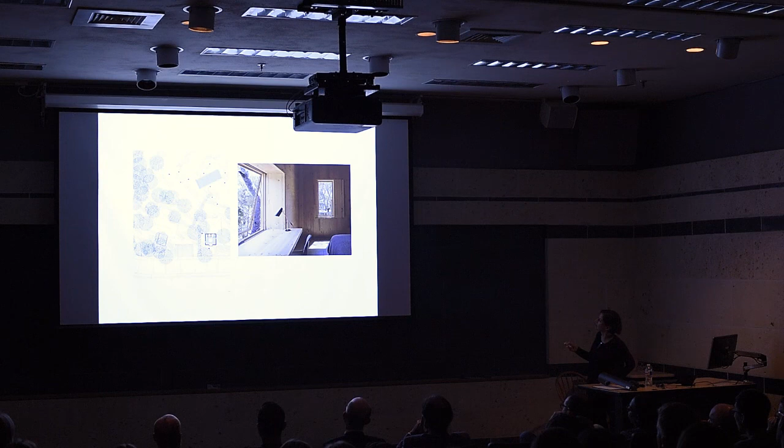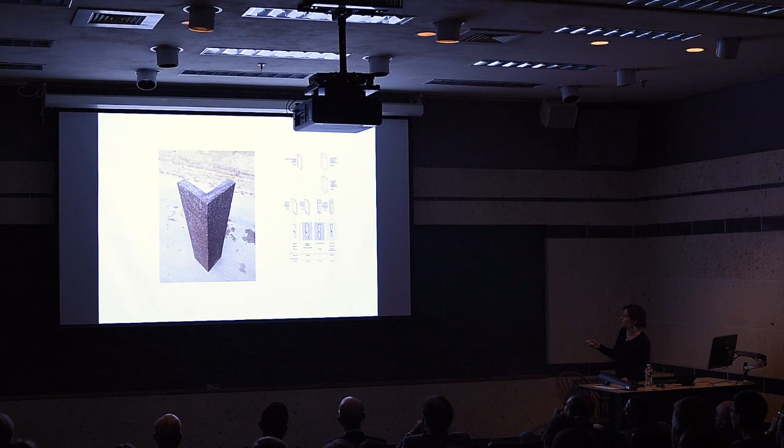Always trying to maintain these spaces as much as possible, and this has split levels, with this room taking on more height, which is this one, looking at the other house. And it's just the cork, in the corner pieces. The corners are solid, taken from a solid block and using all the other pieces.

And very quickly, in this case, we asked them to put the first layer of cork mechanically attached in the factory. They won't do this again because the factory was all black, dust everywhere. But it was very, very good because this first layer was very economical to put up in the factory, in the panel factory. And the second layer was applied on site with a lime breathable mortar.

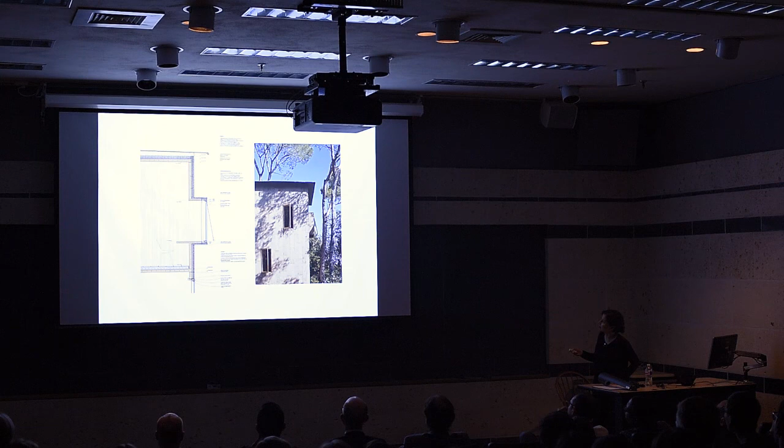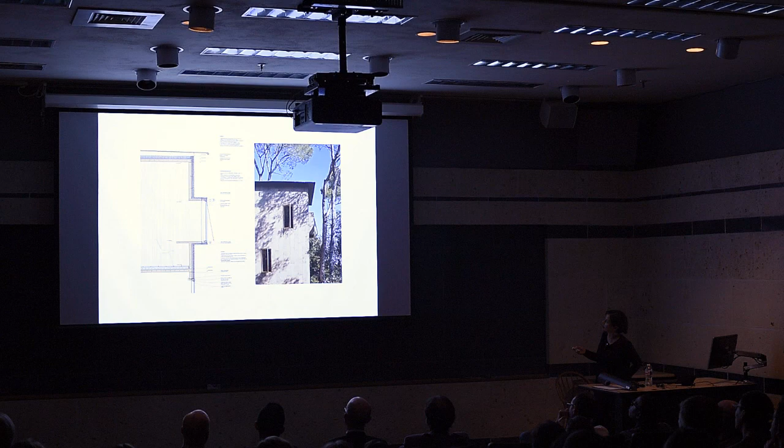And that's it. So 1 hour. Yep. Thank you.